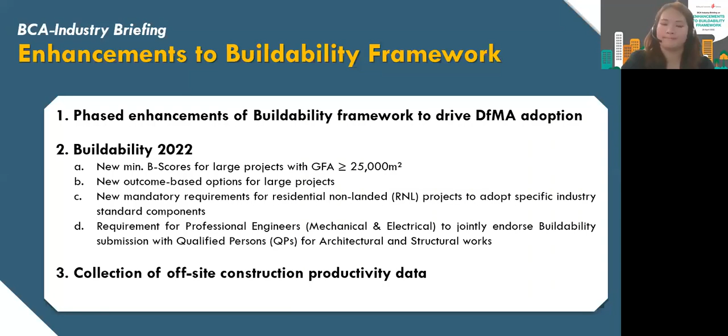As we know, the COVID experience has revealed our vulnerabilities on manpower and supply disruptions. Currently, we are heavily relying on large numbers of workers to support the construction industry. With the limited source of labor supply, it is also increasingly difficult to hire workers. And most of them live in dense dormitory conditions, and that becomes a key vulnerability for the next pandemic.

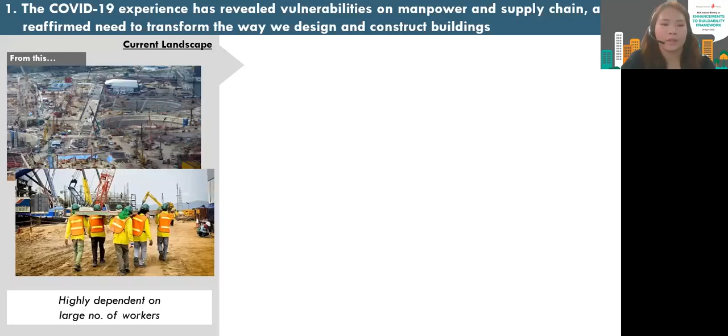To adapt to a post-COVID future, we have to transform the way we design and construct buildings and work towards achieving a leaner workforce. Design for manufacturing and assembly, or in short, DFMA, is one of the key transformational technologies to help raise the construction productivity.

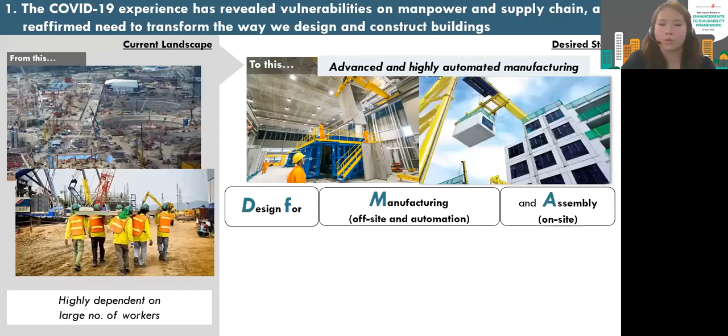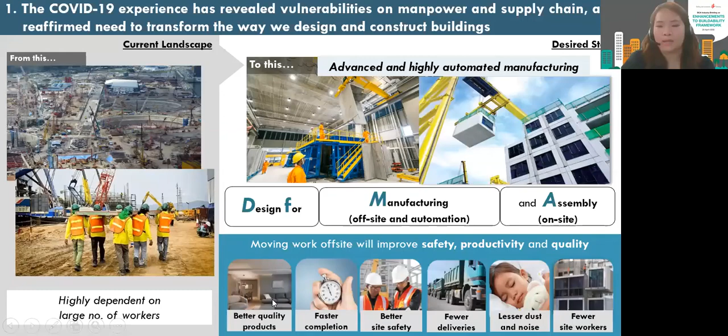And with DFMA, we can build more efficiently to prefabricate building components in a controlled factory for on-site assembly. This way, we can achieve time savings with concurrent works being done on-site and off-site. It also creates better jobs in the built environment sector, a more conducive and safe working environment, reducing the disamenities to the public, as well as achieving better construction quality.

To kickstart our DFMA transformation, we have conducted extensive consultations with industry stakeholders, including developers, consultants, builders, and prefabricators, as well as various trade associations and chambers. We have gathered valuable inputs from our engagements and established a stepwise approach to raise productivity standards for large projects with gross floor area equal and above 25,000 square meters. These projects utilize more manpower and have the economies of scale to adopt DFMA.

As part of our phase 1 enhancements, we started raising the requirements for large residential non-landed projects. In 2019, these projects account for the largest share of industry GFA, about 50 to 60%. And they are also the group that comes with the most labor-intensive activities.

While raising the minimum B scores, we introduced outcome-based options as an alternative to meet higher standards. These options include adopting stipulated prefabrication or DFMA levels. Projects adopting outcome-based options are not required to compute B score and C score, so it provides more flexibility to the industry.

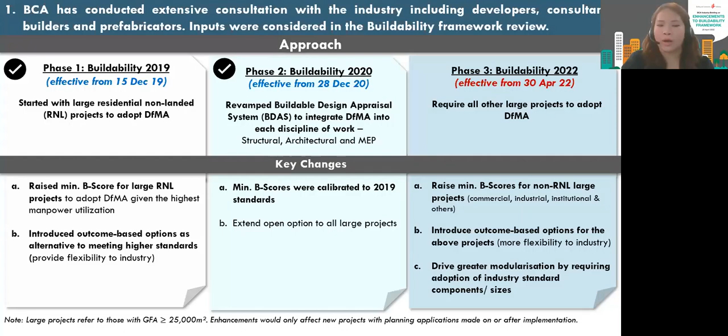To enhance supply resilience, we have to instill DFMA design principles to promote more buildable designs for the ease of manufacturing and assembly. We aim to drive greater modularization by requiring the adoption of industry standard components. These changes in phase 3 would apply to new projects submitting planning permission application to URA on or after 30 April 2022.

Let me take this opportunity to recap on the changes to the Buildable Design Appraisal System, the BDAS, in greater detail. Over here, you will be able to see the differences between the previous and the current version. We have restructured BDAS to make DFMA an integral part of our framework, so as to encourage adoption of prefabrication and modularization within each discipline of work, namely structural, architectural, and mechanical, electrical, and plumbing. There's also a new section on innovations to encourage new productive designs, materials, technologies, and practices.

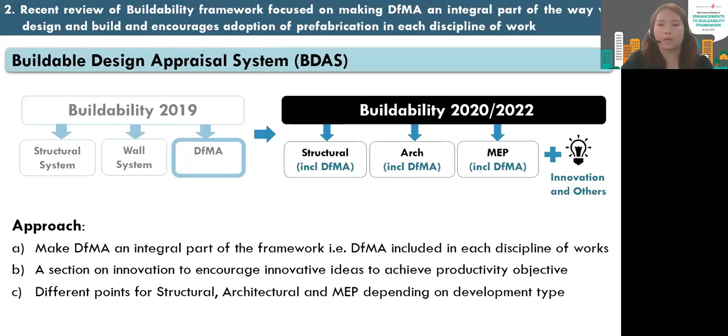Last but not least, we also have different point weightages for different development types. This provides greater granularity and encourages more buildable designs in the particular discipline of work that requires more manpower. I will be sharing more details in the subsequent slides.

The revamped BDAS allows designers to select appropriate DFMA systems to meet the minimum buildable design score. We have a wide range of technologies under each discipline of work, the structural, architectural, as well as the MEP. I'll be showing some examples in the next slide, but over here, the different technologies are allocated with these score points according to the manpower savings achievable in lieu of the labor saving index.

Points are also given to award the extent of modularization, such as repeated designs, use of standard components like columns, beams, prefabricated bathroom units, MEP pump skids. And for the innovation section, it awards bonus points for the use of new technologies, which can achieve at least 20% manpower savings. Some examples include prefabricated common toilets or prefabricated kitchen units.

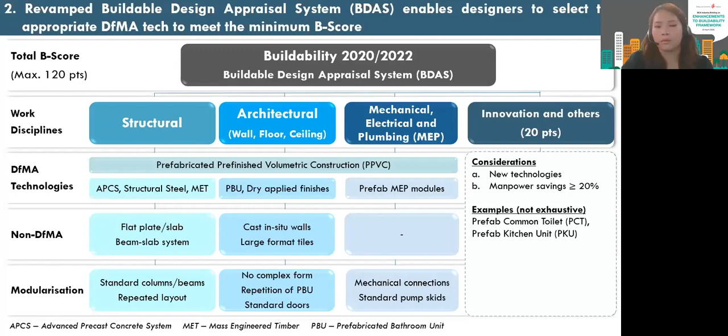We have identified a wide spectrum of productive technologies covering all three disciplines of work. For structural system, you may consider adopting advanced precast concrete systems, which is generally suitable for all development types, structural steel systems for commercial projects, mass engineered timber for institutional projects, prefabricated pre-finished volumetric construction for residential and hospitality projects. These DFMA technologies are able to achieve significant manpower savings of about 20% to 40% at project level.

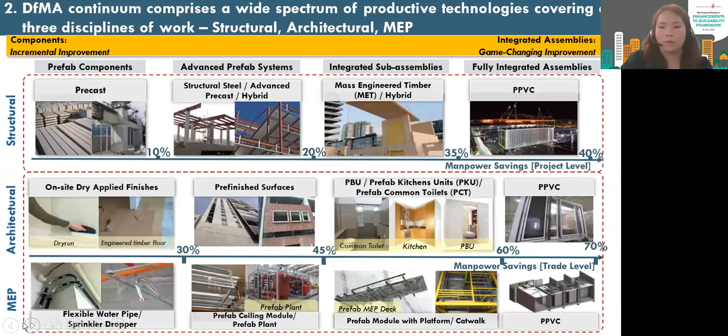And beyond this, there are also productive dry architectural technologies such as engineered timber floor, prefabricated and pre-finished walls, prefabricated bathroom units, kitchen units, and common toilets. For prefab MEP, there are also components such as flexible water pipes, sprinkler droppers, or assemblies such as prefabricated horizontal, vertical, or plant modules. Some of the MEP modules can also be integrated with structural or architectural elements.

Based on our productivity data collected from actual projects through the Electronic Productivity Submission System, also named as EPSS, we understand that the manpower utilization is different for each development type across different disciplines of work. So as you can see here, the point weightages for Buildability 2019 are as follows. We have 45 points for structural, 45 for architectural, as well as 20 points for DFMA. So from the EPSS data, we understand that for private residential non-landed projects, 35% of the manpower is spent on structural, 45% on architectural, and 20% for MEP works.

However, the distribution can be different for public projects, in particular the residential non-landed projects by HDB, as the extent of architectural works in terms of finishings and also the MEP works are lesser compared to the private residential non-landed projects. Hence, we revamped the appraisal system with different point weightages for each development type. Over here, we have grouped them into various categories, and each of them adds up to 100 points. This would foster greater collaboration amongst designers to plan for more buildable designs in that particular discipline of work that requires more manpower. With the change in point weightages, we had to rebase the minimum B scores.

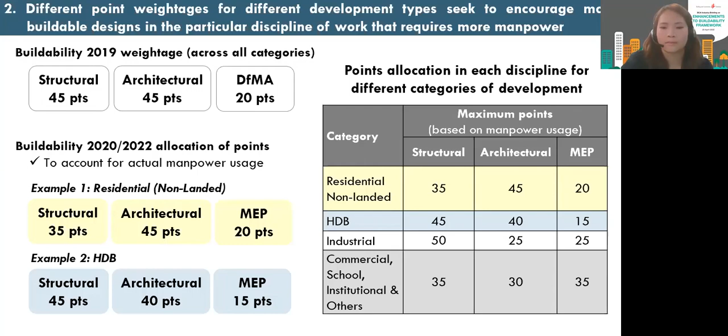Let's take a look at the minimum B scores for Buildability 2019, 2020, as well as 2022. For mid-sized projects with GFA between 5,000 and 25,000 square meters, the minimum B scores are as follows. It may seem odd to you that the minimum B score for 2020 and 2022 is now lower than before. For example, for residential projects, currently it is 68 points compared to 85 points in 2019. It is due to the calibration on minimum B scores with the revamped appraisal system. It is not a decline in productivity standards.

For large projects with GFA equal or above 25,000, we started raising the minimum B scores for large residential non-landed projects in 2019 from 90 points to 92 points as part of our Phase 1 buildability enhancements to drive DFMA adoption. For Phase 2 enhancements in 2020, we revamped the appraisal system and rebased the minimum B scores to 2019 standards. Take the residential projects as an example. We have 92 points in 2019 versus 80 points in 2020. They are actually comparable.

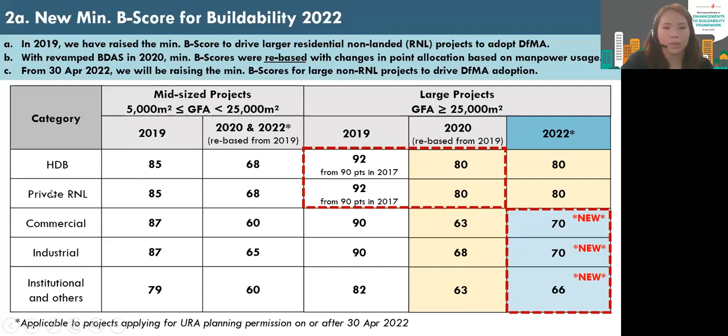Since 2019, designers actually have the flexibility to select one of the three ways to meet buildability requirements. First, it would be the code compliance option by meeting the minimum B score. Second, we have the deemed acceptable solutions with stipulated prefabrication levels, system formwork requirements, or DFMA coverage. These were introduced for the large residential non-landed projects at the moment. Third, we have the open option, which seeks to encourage projects to adopt novel, innovative, and productive technologies outside of the current DFMA continuum. We require projects to demonstrate through a proposal a minimum of 20% productivity improvement over 2010 levels. The productivity data are published in our website.

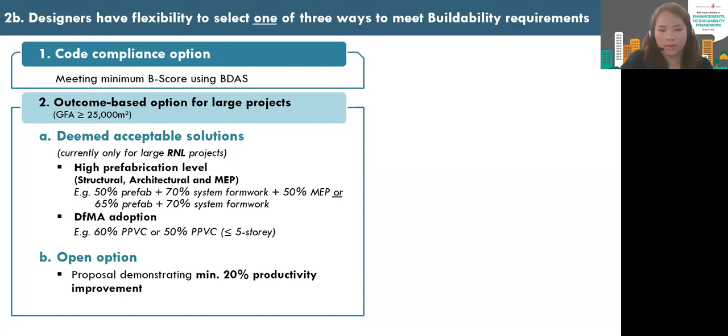For large government land sales projects stipulated with DFMA or minimum productivity improvement requirement, you may consider opting for one of these options if eligible. Last month, we issued a circular to inform the upcoming changes to buildability requirements. So in the next slide, I will be sharing more details on our proposal, as well as the submission requirements.

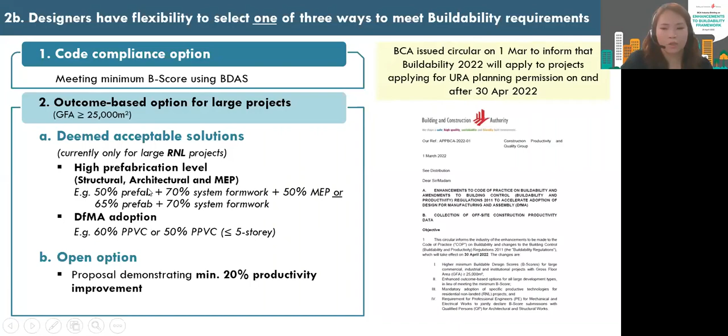Okay, let's first zoom in into the large residential non-landed projects. Here are the requirements for Buildability 2020. Both public and private residential projects are required to meet a minimum B score of 80 points. Alternatively, they can also opt to comply with any of the outcome-based options here, whichever suitable.

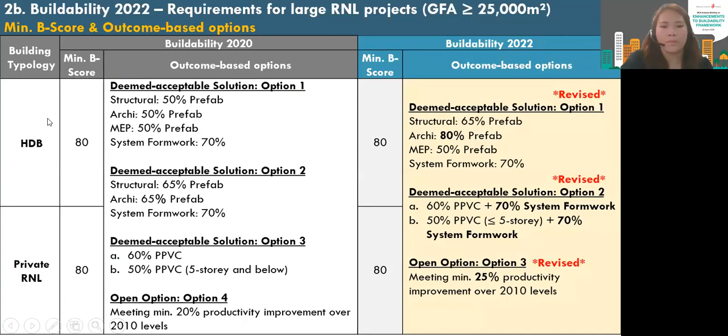In 2022, we maintain the minimum B scores of 80 points, but streamline the outcome-based options as follows. The differences are highlighted in bold. So for option 1, it is actually a combination of the previous option 1 and 2 in Buildability 2020.

We noted that the industry has demonstrated capability in adopting larger extent of prefab walls. Hence, we are raising the prefab architectural level to 80%. For option 2, we will include the requirement for 70% system formwork for the remaining cast in situ areas. And for the third option, we will raise the requirements from 20% to 25% productivity improvement over 2010 levels.

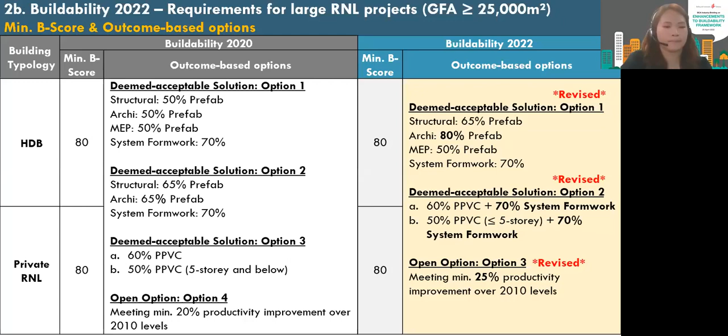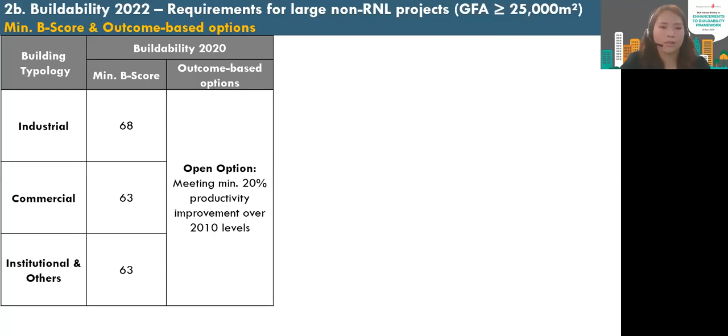For non-residential projects, here are the current minimum B scores and outcome-based options. So come 2022, 30th April, we will be raising the minimum B scores at the same time introduce outcome-based options for these large projects for industrial, commercial, as well as institutional and other projects.

For large industrial and commercial projects, the new minimum B score would be 70 points with the aim to drive DFMA adoption and also to provide greater modularization and standardization. As for the institutional and others category, it covers a more diverse range of projects, including nursing homes, schools, community facilities, and more. Some may have lesser scope for modularization and standardization, and hence we are setting a lower minimum B score at 66 points.

So to cater more design flexibility and encourage innovation, we are introducing these three outcome-based options as follows. For option 1, we would require projects to fulfill a minimum of 60% prefab or 50% DFMA coverage for steel, APCS, or MET. For architectural levels, a minimum of 80% prefab or 70% for office projects.

Office buildings tend to have lesser internal walls since office space is usually tenanted out. So that explains why the percentage coverage is slightly lower. For MEP, similarly, we require a 50% prefabrication level. System formwork, 70% for the remaining cast-in-situ area.

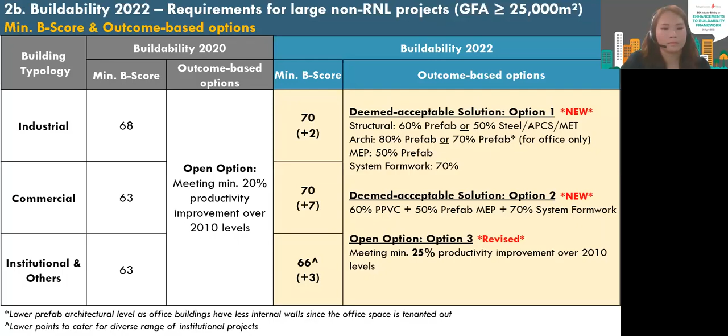Building projects with GFA equal and above 5,000 square meters are required to make buildability submissions when making structural and building plan submissions. Let me guide you through the submission requirements for the three different options.

So this option is the code compliance option, which most of you are familiar with. We require projects to submit the B-score form with computation at STBP submissions, as well as BS03 for as-built TOP submissions.

Both submissions would require you to prepare a buildability detailed design implementation plan, also named as BDIP. Within the BDIP, you should be including the markups on plans with computation of coverage of building systems and components.

You are also required to submit site photos at TOP stage. We also require the builders to prepare the constructability score form, which is the CS01, and the constructability implementation plan.

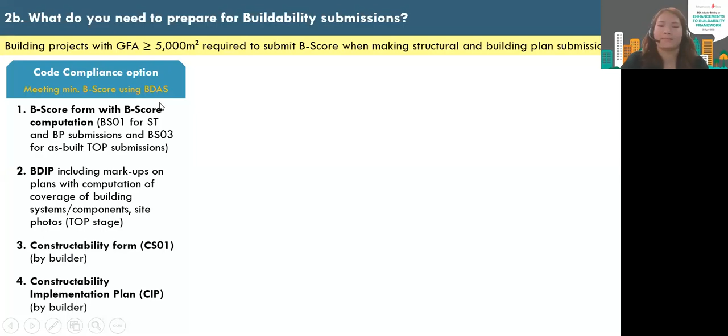Next, the outcome-based option, deem acceptable solutions. For B-score, for this option, similarly, we still require you to submit the B-score form for declaration of the options chosen. So within the form, you need to indicate which deem acceptable solutions you're opting for, both for BS01 as well as BS03. However, you need not compute the B-score for the individual blocks.

You will only be required to submit the inputs on the summary page. Similarly, we will also require you to submit a deemed acceptable proposal to illustrate the extent of use of the DFMA systems, prefabrication, as well as system formwork. And also to supplement us with the site photos at TOP stage.

Coming to the open option, which is catered more for projects with novel, innovative, and productive construction methodologies. We do require you to submit the score form to declare your choice of option, which is the open option, for BP submission as well as as-built TOP submissions.

So on top of the B-score form, you are required to submit the project productivity improvement plan, PPIP, to explain the design concepts, including the proposed design technologies and systems, the level of use of prefabrications, buildable features such as modularization, standardization efforts, use of offsite finishes. You may also adopt innovative features and robotics and automation for your project.

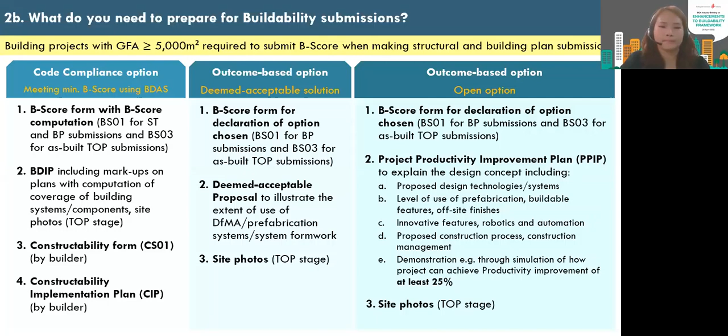Now, how do we compute the prefabrication level for different disciplines of work? We note that prefabrication is actually challenging for basement works, and hence prefabrication level is measured based on the superstructural works. For prefab structural systems, it is measured based on the total constructed floor area, also known as CFA. And these are the systems that are considered prefab.

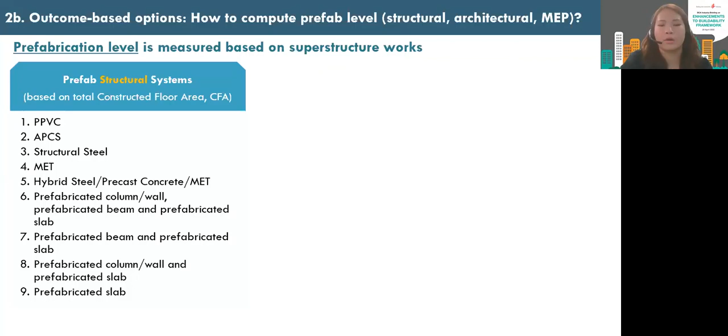For example, DFMA technology such as PPVC, APCS. APCS refers to advanced precast concrete systems, the use of structural steel, as well as mass engineered timber, or a hybrid of these systems can be considered. The use of prefab slab with a combination of other prefab elements are also considered.

For prefab architectural systems, it is measured based on the total wall length of the superstructural works. These systems can include the use of PPVC, PBU - prefab bathroom units, prefabricated and pre-finished walls - some may come with MEP services, or precast walls, dry walls, curtain walls, off-form precast walls, as well as lightweight concrete panels.

For prefabricated MEP systems, for a start, we actually identify a set of qualifying criteria which are suitable for implementation of prefab MEP systems. Hence, the prefab level is actually measured based on the qualifying area. In the next slide, I will go through how you actually need to compute it.

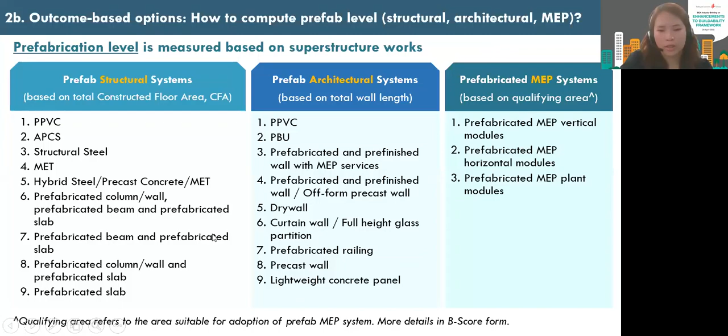Prefab MEP level is computed based on the total area of prefab MEP systems, including horizontal, vertical, and plant modules, over the total qualifying area of the three systems.

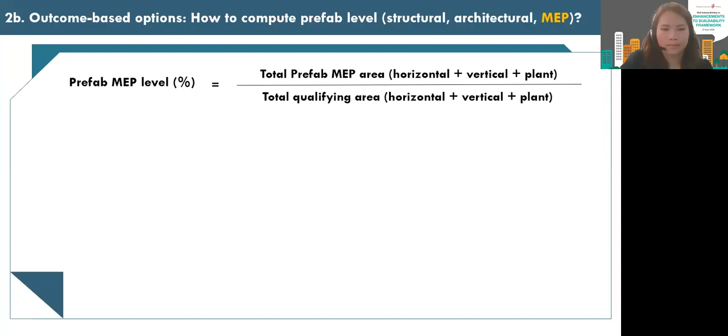For horizontal modules, the qualifying area is actually computed based on the common areas - common corridor areas, including lift lobbies.

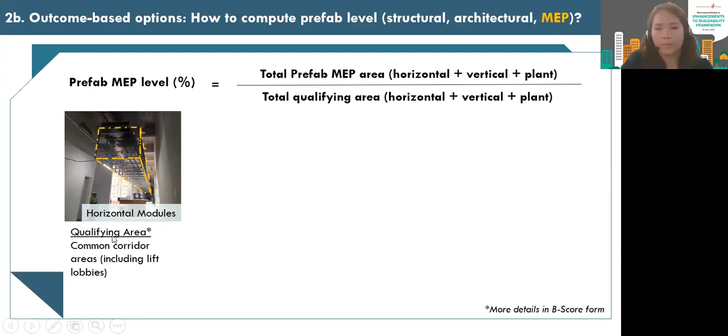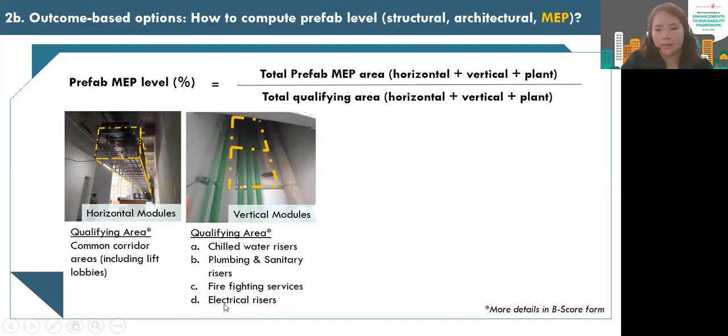For vertical modules, the qualifying area is computed based on the area of the risers or service ducts. This can include chilled water, plumbing and sanitary, firefighting services, as well as electrical risers.

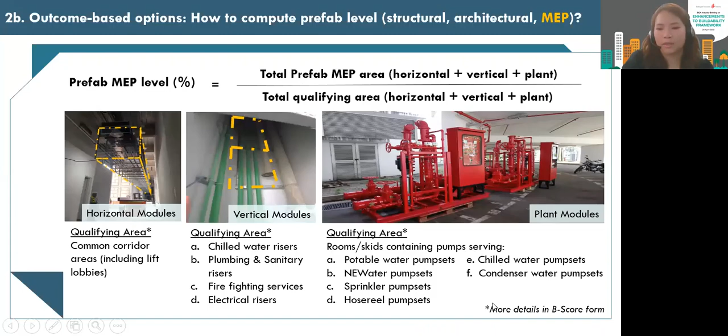The details of the qualifying area can be found in the B-Score form. There are also some exclusions that we acknowledge are not commonly adopted. More details can be found in the B-Score form.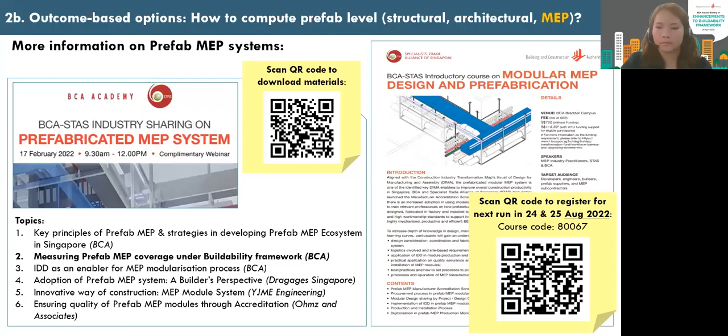Coming back to the computation of DFMA coverage, prefab pre-finished volumetric construction, which is PPVC - the coverage is actually measured based on the constructed floor area of the system over the total CFA of the superstructure works or components used for residential or accommodation purposes, which includes lift lobbies as well as corridors.

However, we acknowledge that there are certain areas that are not suitable for PPVC adoption. Hence, in your computation you can exclude the area of E-deck, void deck, swimming pools, roofs, car parks, and landscape areas. But if, let's say, the residential floor areas are at the same stories, you will need to include the areas of the PPVC modules.

Hotel lobbies are also excluded in the equation.

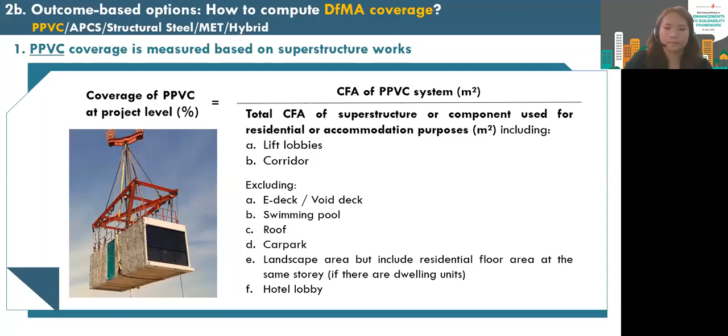Coming to advanced precast concrete system, APCS, the coverage is actually measured based on the constructed floor area of precast slab with that comprises at least 4 out of 6 of the APCS features. These features must come with a minimum of 65% coverage.

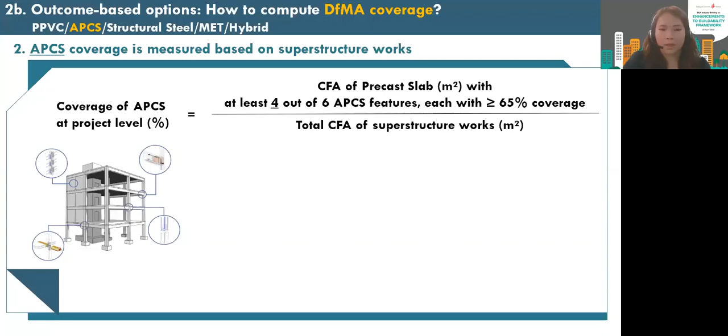So here are the 6 features. First of all, we have the integrated precast components comprising at least 2 structural or architectural elements. These can include double bay facade wall, beam facade wall, double tier column, precast household shelter, precast refuse chute, PBU, pre-finished facade walls, as well as precast external wall with cast-in windows. So you need to adopt one of the many examples over here for feature 1 and ensure that the minimum coverage is at least 65%.

Feature 2, mechanical connection for precast column, precast wall. This includes horizontal joints such as column shoes, spiral connectors, as well as grouted sleeves. Feature 3, mechanical connection for precast beams. This includes telescopic beam connectors and grouted sleeves. Feature 4, mechanical connection for precast walls vertical joints, which can be in form of flexible loops. Feature 5, mechanical connections for other precast components such as the use of precast staircase flight together with precast landing.

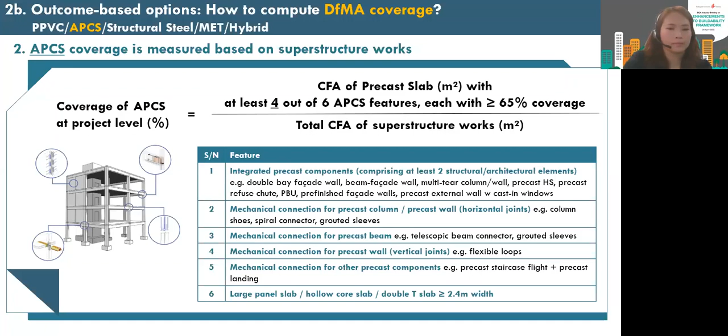So for the computation of coverage for structural steel, mass engineered timber, or a hybrid of DFMA technologies, it is similarly based on the constructed floor area of superstructure works using any of the materials, structural steel, MET over here. For hybrid structures, all 3 structural elements, the beam, the columns, and the slab, have to be either precast concrete, steel decking, or MET slab.

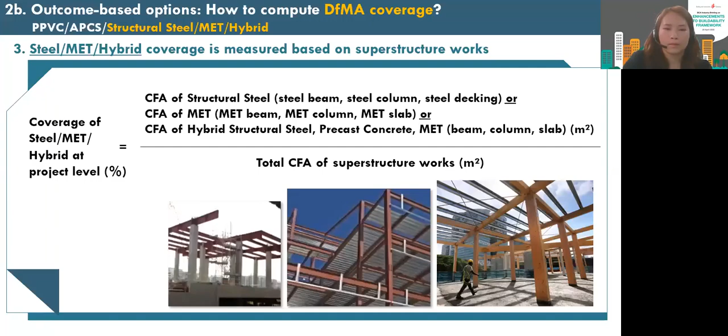Coming to the measurement of system formwork, it is actually measured based on the superstructure works, and both horizontal and vertical system formwork must meet a minimum of 70% based on the remaining cast in situ area.

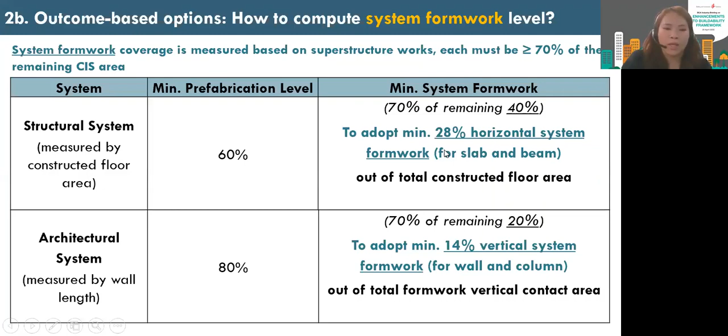For illustration purpose, let's say a project is opting to comply with one of the deemed acceptable solutions of maybe 60% prefab structural system and 80% prefab architectural system. So this project would need to adopt 28% horizontal system formwork for slab and beam out of the total constructed floor area. How do I get this 28? It's basically 70% of the remaining 40% cast in situ works.

For vertical system formwork requirement, project will need to adopt 14% based on the vertical contact area, which is 70% of the remaining 20% cast in situ wall systems. So for projects adopting prefabrication beyond the stipulated requirement, these areas can also be counted as part of fulfilling part of the system formwork requirements.

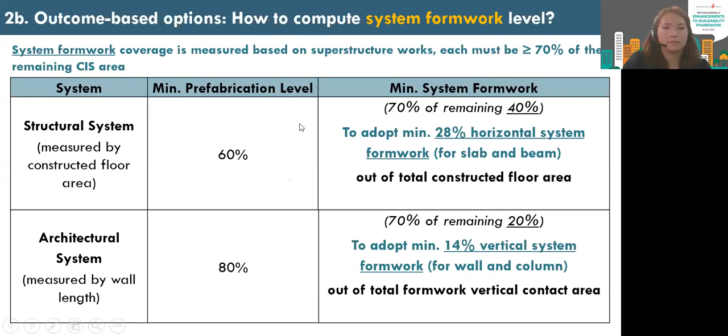In addition to raising the minimum B score and introducing the outcome-based options, we are making some enhancements to the framework to encourage greater design modularization. Modularization optimizes the benefits of DFMA and paves the way for more cost-effective prefabrication of components. Our key strategies include, first, expanding the scope of mandatory items.

Over here, our enhancements are highlighted in blue. First of all, we increase the coverage for these 2 items, the use of prefabricated staircase, as well as precast refuse chute. Currently, we require a minimum of 65% precast staircase and precast refuse chute to come in industry standard dimensions. We will increase the coverage to 80% for these 2 items.

Next, we move some of the non-mandatory items into the mandatory list. Over here, you can see that we have PBU, a new item, as well as precast household shelter, both in industry standard sizes. We find the scope for PBU and precast household shelter to be standardized without causing much impact on the overall design of the project. So for a start, we require adoption of minimum 65% PBU and 65% precast household shelter, of which 60% have to be in industry standard sizes to allow some design flexibility.

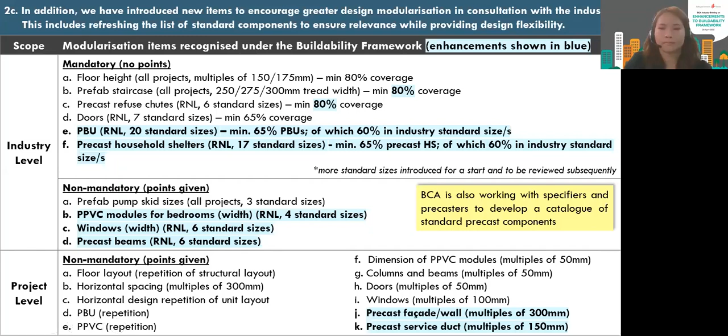In Buildability 2022, we are also introducing a new requirement for PE M&E to jointly endorse buildability submissions with QP for architectural and structural works.

Since 2017, we have introduced DFMA as part of our framework, and prefab MEP items have been in the framework for over the past 5 years, as they also contribute towards raising construction productivity.

For projects subject to Buildability 2022, we would require PEs for M&E works, executing detailed design, to prepare B-score for the MEP section of the form, as well as the Buildability Detailed Design Implementation Plan, also known as BDIP, with drawings with markups on plans and computation of coverage for MEP modules and systems.

With this, we seek to foster greater collaboration across all disciplines during the upstream design stage, and to consider user, spatial, and loading requirements to accommodate prefab MEP systems upfront.

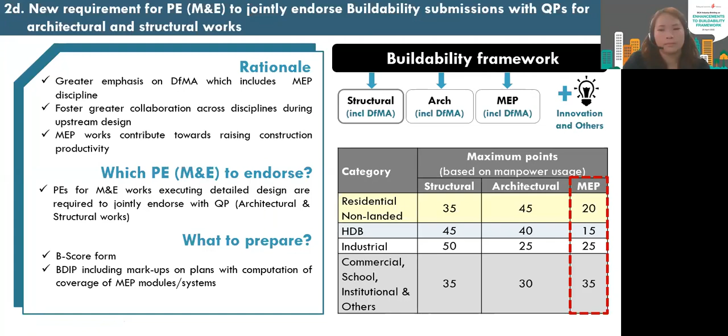Coming to one of the last requirements: currently we do require builders of all building projects with GFA equal to and above 5,000 square meters to submit construction productivity data monthly through the Electronic Productivity Submission System, also named EPSS.

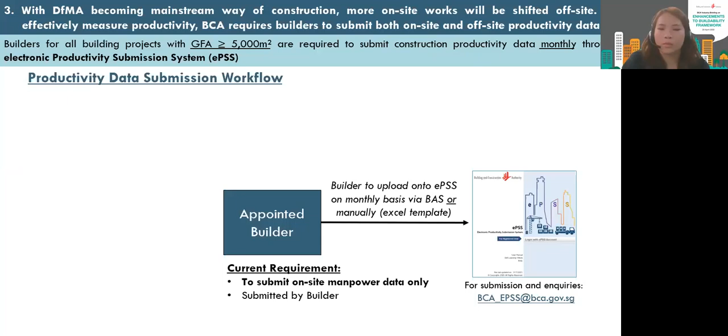With DFMA becoming the mainstream way of construction, more on-site works will be shifted off-site. To effectively measure productivity, BCA requires builders to submit both on-site and off-site productivity data.

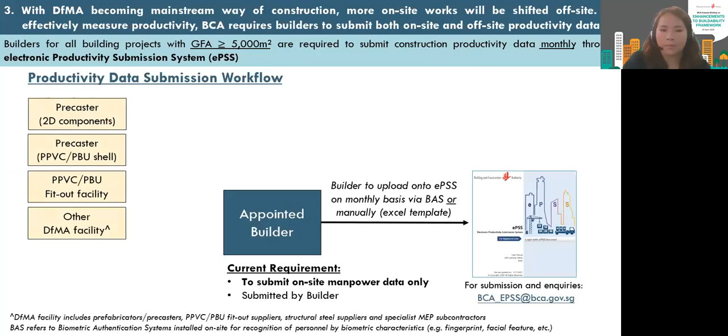Hence, for projects issued with permit to carry out structural works on or after 30th April 2022, we would require both on-site and off-site manpower data to be submitted through EPSS.

In terms of the submission workflow, the DFMA facilities, including prefabricators, precasters, PPVC, PBU fit-out suppliers, structural steel suppliers, specialists, MEP subcontractors, including those overseas, would have to provide offsite manpower data to the builder.

The appointed builder would then collate both on-site as well as off-site data for submission to EPSS on a monthly basis. BCA would be providing a template on our EPSS portal from 30th April 2022, and builders will need to log into their account to download the template.

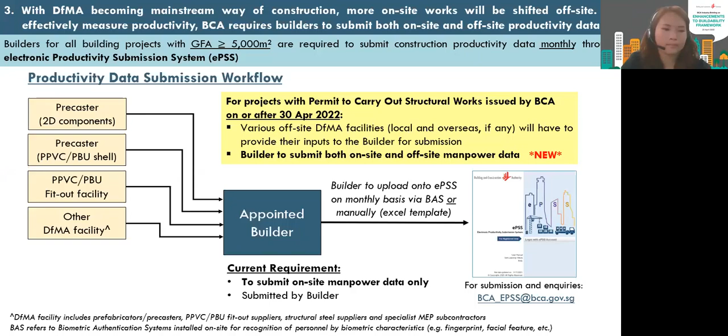Now I will be going through some of the frequently asked questions. Some of you may ask, why is the new minimum B score lower than before?

Actually, the new minimum B score is not a decline in standards. It is due to the revamped buildable design appraisal system in 2020, whereby we restructured the appraisal system and give different point weightages for the various disciplines of work, depending on the development type you are subject to. Each technology is allocated points based on manpower savings, and we have removed the use of labor saving index.

So in order to compute the correct minimum B score for your project, please ensure to use the correct B score form to assess the adequacy of your design.

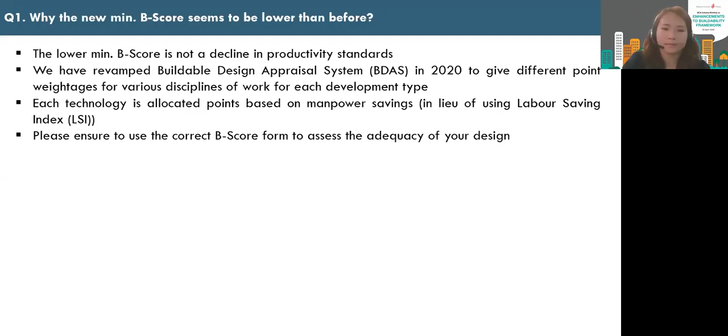Question 2: for outcome-based options, can I opt for deemed acceptable solutions for smaller projects with GFA less than 25,000 square meters? Unfortunately, outcome-based options are currently available for large projects with GFA greater than or equal to 25,000 square meters only.

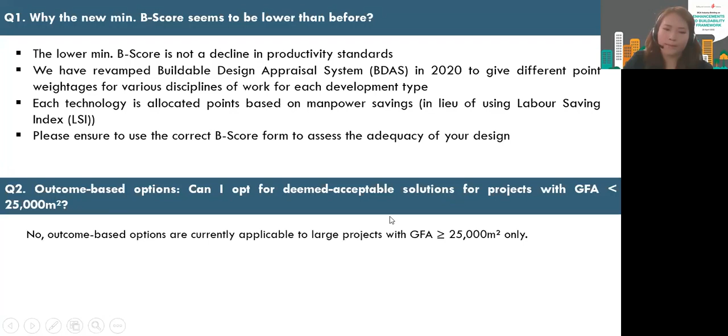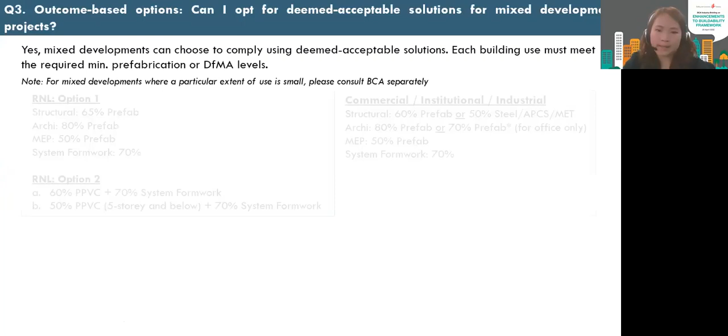Next, for outcome-based options, would you be able to adopt deemed acceptable solutions for mixed developments? Yes, mixed developments can choose to comply using the deemed acceptable solutions. However, each building use must meet the required minimum prefabrication levels or DFMA levels.

So let's say if you have a residential non-landed project with commercial use, the residential non-landed component would have to meet the requirements. And at the same time, for the commercial part, you would also need to meet the structural, architectural, MEP, and system formwork requirements.

So for mixed developments whereby a particular extent of use is small, we would suggest you consult us separately.

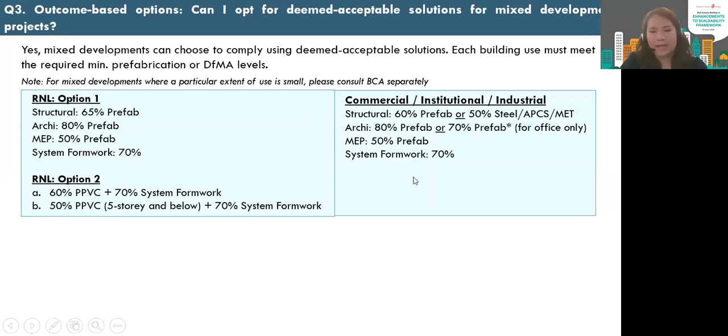Okay, coming to again on outcome-based options, what if you adopt prefab systems beyond the requirement? And how are we gonna compute the system formwork requirement? So first of all, for projects adopting outcome-based options, we would require 70% of the remaining cast in situ area to adopt system formwork. So if you have adopted prefabricated systems beyond the stipulated requirements, these can be considered towards fulfilling the system formwork requirement.

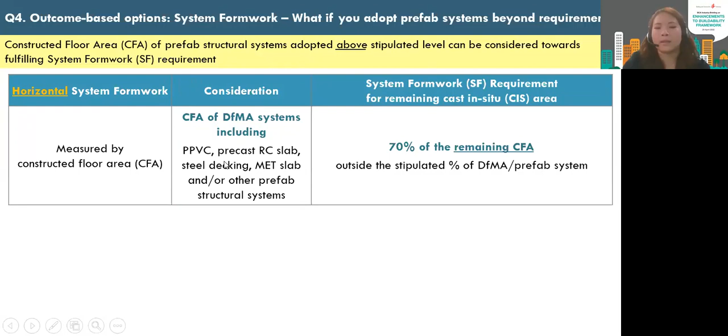And for computation of horizontal system formwork requirement, the constructed floor area of DFMA systems, including the use of PPVC, precast RC slabs, steel deckings, or other prefab structural systems can be considered. So let's say if you have a residential non-landed project which chooses to comply with the 60% PPVC as well as the 70% system formwork option, here's an illustration.

Assuming we have a project with total CFA of 100,000 square meters, and out of which 60% have to be of PPVC. So for the purpose of illustration, we assume that 60% PPVC coverage equates to 65,000 square meters in terms of CFA. So on top of that, let's say the project has also adopted some form of precast slab. It could be 4,500 square meters.

We actually would take 70% of the remaining cast in situ area, which is 24,500 square meters, and subtract the additional CFA of this precast slab, 4,500 square meters. So this gives rise to the horizontal system formwork requirement of 20,000 square meters for the cast in situ superstructure works.

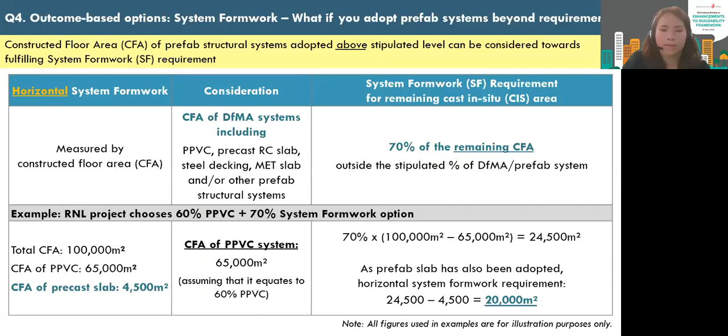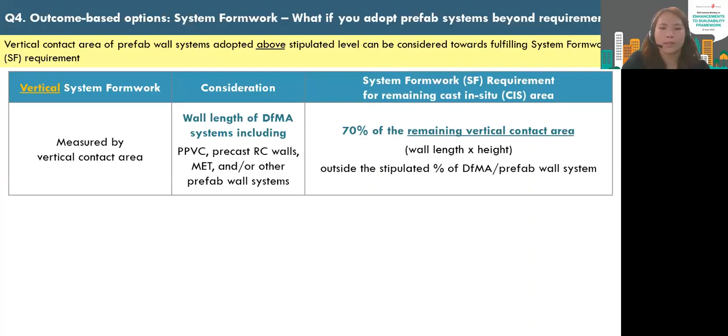Similarly, for computation of vertical system formwork requirement, the wall length of the DFMA systems, including the use of PPVC, precast walls, and other prefab systems can be considered. So using the same example, let's say a project has a total wall length of 10,000 meters, and assuming the 60% PPVC requirement, the coverage equates to around 7,000 in terms of wall length.

And on top of that, the project has adopted prefab walls of 1,000 meters with vertical contact area of around 10,000 square meters. So we would be taking the 70% of the remaining vertical contact area, which is 12,000 square meters. 12,000 is actually converted from 2,100 meters in terms of wall length. This refers to the cast in situ wall length.

So we take 12,000 and subtract the 10,000 square meters in terms of vertical contact area. And this would give you 2,000 square meters. And for your project, you will need to adopt system formwork for these 2,000 square meters for cast in situ superstructure works.